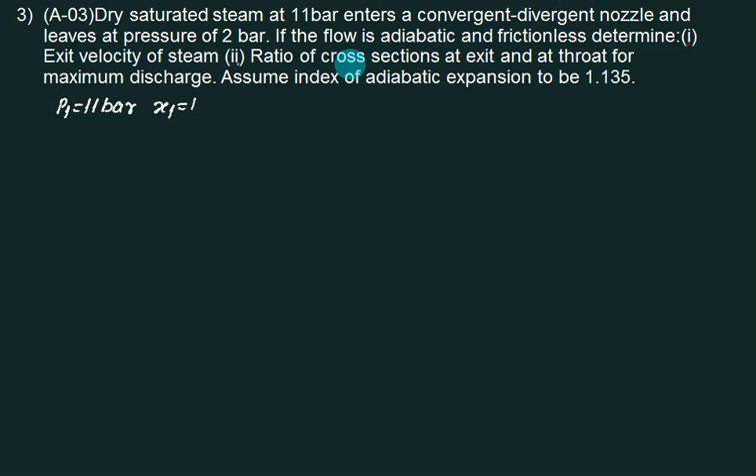Dry saturated steam at 11 bar, convergent divergent nozzle, leaves at pressure 2 bar, P3 2 bar. Steam is initially dry and saturated, n equals to 1.135. The flow is adiabatic and frictionless. It means that S1 equals to S2 equals to S3. You want to find out exit velocity of steam, that is V3.

You want to find out ratio of cross section at exit and at throat, A3 by A2. For maximum discharge, so we always design for maximum discharge, because Mach number equal to 1. Assume index of adiabatic expansion is 1.135. That we already taken. Very first job is to calculate P2 using standard ratio.

P2 by P1 equals 2 upon n plus 1 to the power n upon n minus 1. We know this ratio is standard 0.577. So what is P2? 0.577 multiplied by 11, 6.34. Mollier we will approximate to 6.5 bar for quick calculation.

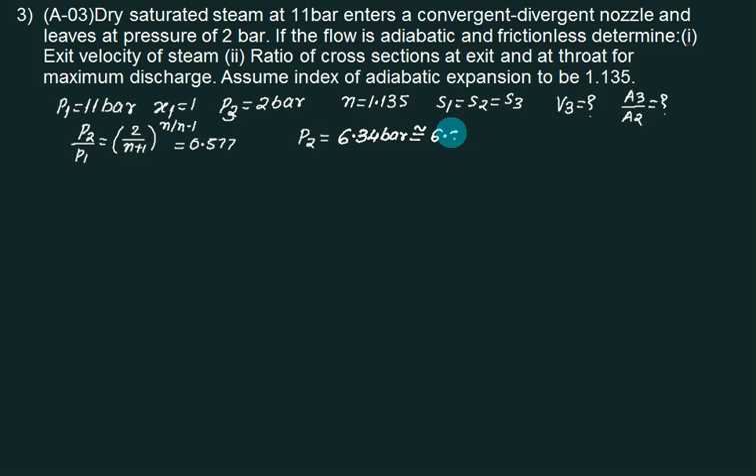10 and 20. How many lines are there? 1, 2, 3, 4, 5. 5 lines. Second line is 12 bar. Between 10 and 12. Second line is 12, then 14, 16, 18. So 11 line is between first and second. So you have to construct it. Got the point?

This point. And you have to intersect with dry and saturated line. Now record enthalpy here. All of you got 2780. Okay, once located, draw vertical line first. 6.5. We have line of 5, then line of 6, then line of 7.

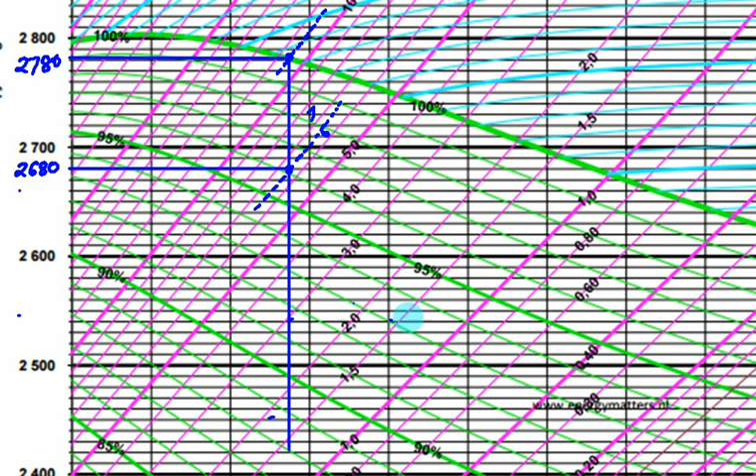What is P2? 6.5. Between 6 and 5, draw one imaginary line. Very close to 2680. Last point. What is back pressure? 2 bar. So 2 bar line is available. Record enthalpy. You write down this value in the HS diagram. Point number 2 is in the wet region, and point number 3 is also in the wet region.

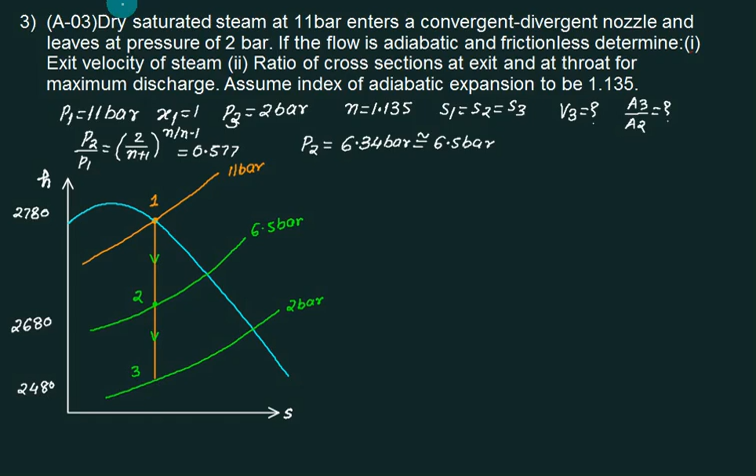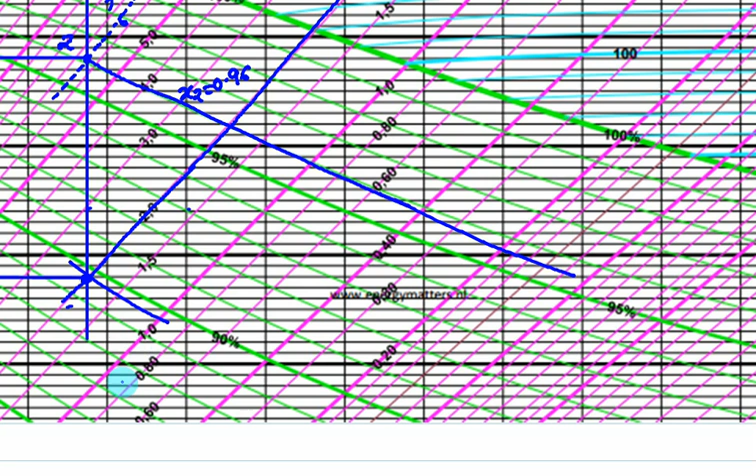Now go back to point number 2. Mark it. Now see the dryness fraction line there. So x2 equal to 0.96. All of you got it? Now back to last point. See dryness fraction. Is it less than 0.9? It's very close to 0.9, we will make it 0.89. So two values we will make ready first.

One is v2. v2 is x2 into vg at 6.5 bar; we have taken data for 6.5 bar. x2 is 0.96. vg at 6.4 is 0.296 and vg at 2 bar is 0.885. So we know the specific volume at point number 2 and point number 3. Are we able to calculate capital V2?

So capital V2, velocity, is under root of 2 times H1 minus H2 multiplied by 1000. V3 equals to under root of 2 times H1 minus H3. The first answer you have to find out is exit velocity of steam. So this is my answer 1.

Then I have to find out the ratio. For ratio, I will write down the formula for m dot: A2 V2 divided by specific volume equals A3 V3 divided by specific volume. So we want A3 by A2. The answer is 1.6.

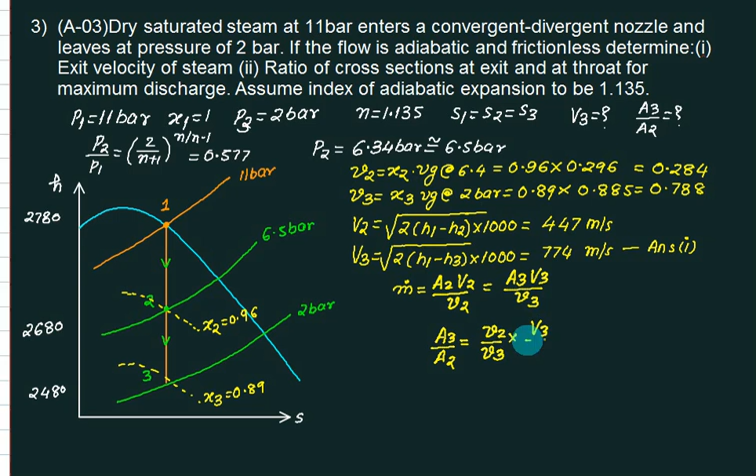So we want A3 by A2. So what is A3 by A2? A3 by A2 is equal to v3 by v2 multiplied by V2 divided by V3. The final answer is 1.6.

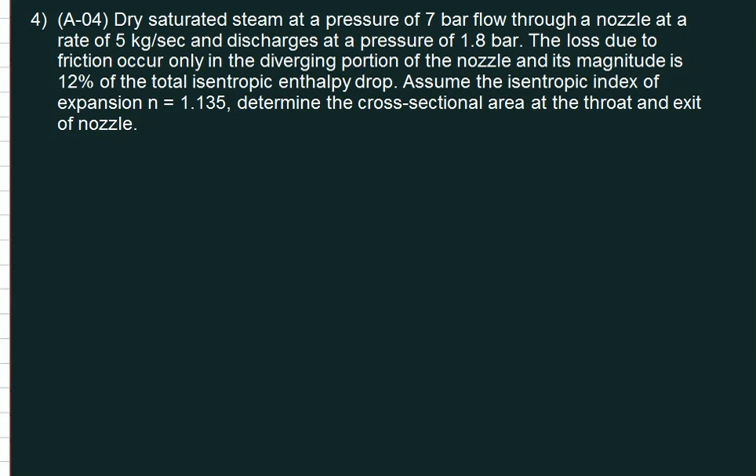Dry saturated steam at a pressure of what? 7 bar. So P1 equals 7 bar. Initially it is dry and saturated, so x1 equals 1. The index is 1.135. What mass flow through the nozzle is given? M dot is 5 kg per second. 5 kg per second is very large.

Discharges to a pressure of 1.8 bar. So P3 equals 1.8 bar. I have to confirm whether he says convergent divergent. Yes, he says convergent divergent. So confirm 1.8 bar. The loss due to friction occurs only in the divergent part. It means S1 equals S2, but S3 will be greater than S2. So what is the loss? Loss is 12%. So what is efficiency? 88%.

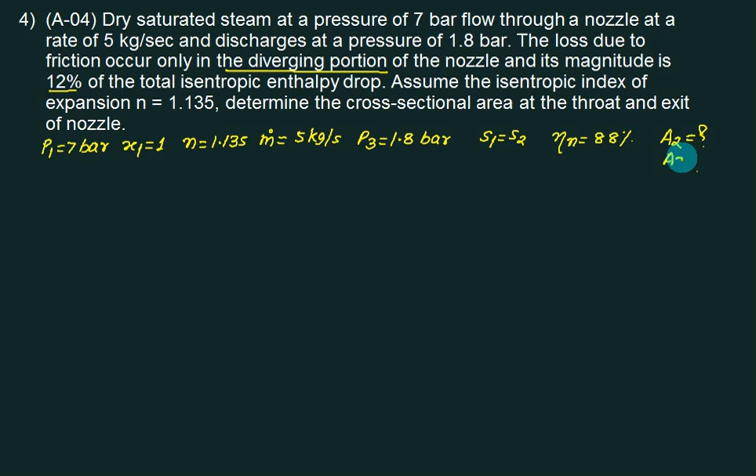Of the total isentropic enthalpy drop, the index is this. Determine the cross-sectional area at the throat and exit. You want to find out A2, and you want to find out A3. Is the first point on the dry saturated line? Yes. So this one is 7 bar. This is a point on the dry saturated line. From this point you have to draw a vertical.

Now we need to calculate P2 first. P2 by P1, I think this ratio is fixed at 0.577. So what is the value of P2? 4 bar. Back pressure is 1.8 bar. So what do we need? We want H1, H2, and H3. Is point number 2 here or point number 3 here? Point 2 is at this point, and 3 will be here. We are moving from 1 to 2, then from 2 to 3.

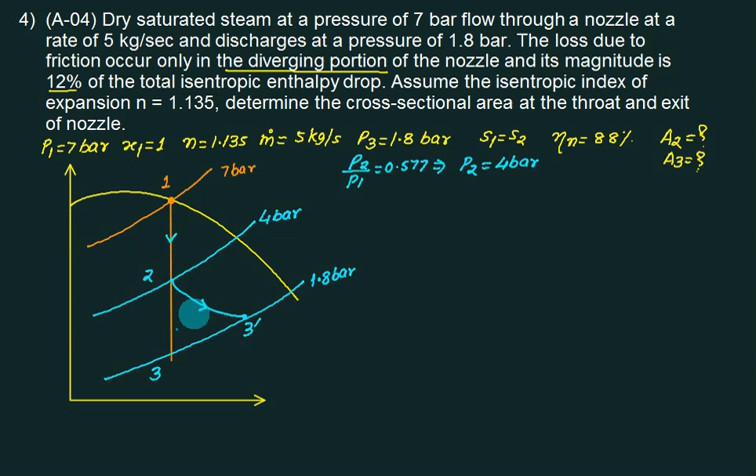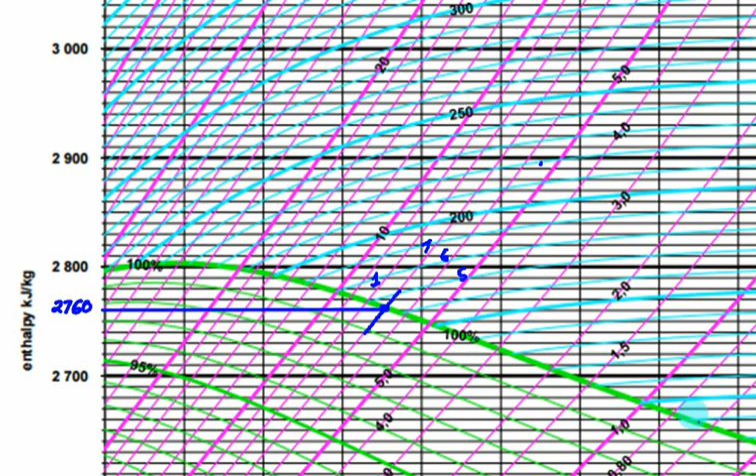Supply pressure is 7 bar. So this one is 5, this one is 6, this one is 7. 7 is the third line. Mark this point. This is point number 1 on the 7 bar line. Record enthalpy: is it 2760? 2760. Draw a vertical from this line on the graph to 4 bar. The 4 bar line is available. We have 3 bar, we have 4 bar. 4 bar is this line.

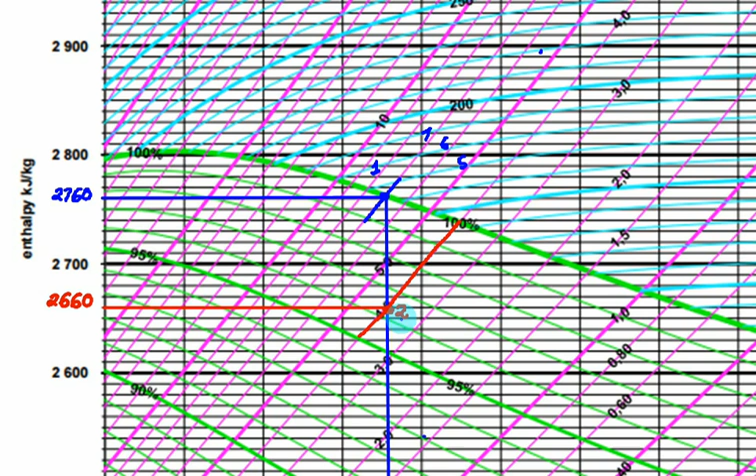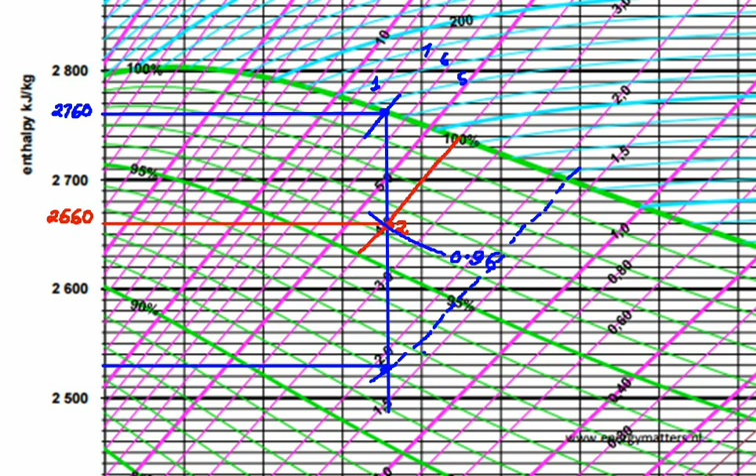60 or 50? You want to find out dryness also. This one is 0.95, so this is 0.96. What is back pressure? 1.8. Is 1 available? Is 1.5 available? And 2 available. So approximately the middle line between these two will be 1.75. Is it 2530? So we have recorded this value and we also found the dryness fraction X2. Is it 0.96?

Now you do the first one. You use the nozzle efficiency, defined as H1 minus H3 dash over H1 minus H3. Use this data and efficiency equal to 88 and calculate H3 dash. So we got H3 dash equal to 2557.6. To record the value of X3 dash, we have two options: Mollier and steam table. I prefer the steam table because I am not able to locate this value exactly. So this equals HF plus X3 dash HFG. What is the pressure at point number 3? 1.8 bar. Collect data from the steam table and find X3 dash. This is always a better option.

0.93. At point number 2, v2 equals X2 into Vg2. Point number 2 is at what pressure? 4 bar. Wait, do all calculations at one time. v3 dash equals X3 dash Vg at 1.8 bar. Now open the steam table and do both calculations. It is over. Okay, let's calculate V2. V2 equals the square root of 2 times H1 minus H2 into 1000.

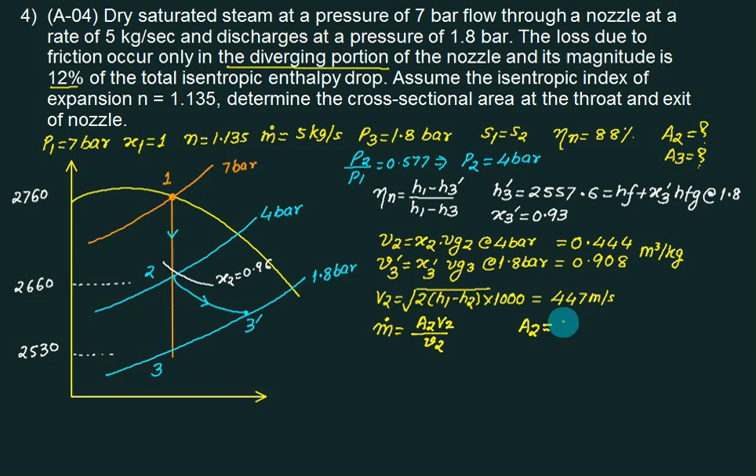This answer is 447. M dot equals A2 V2 divided by specific volume. Mass is given as 5. Specific volume is known, velocity is known, so we can calculate A2. Your answer will come in meter square. If the answer is very small, then write it in cm square. We can make it 49.6 times 10 to the power minus 4, meaning 49.6 cm square.

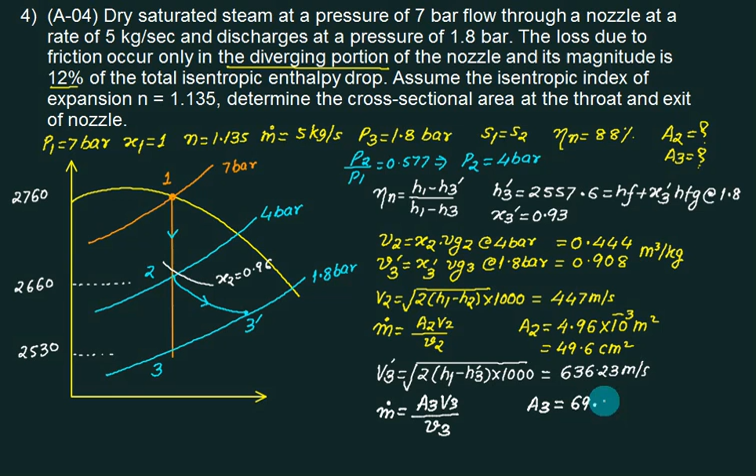What is the velocity at exit? Square root of 2 times H1 minus H3 dash. This is dash because it's an actual point. So velocity is 636. Repeat the formula for m dot with volume. 69. These are all approximate answers.